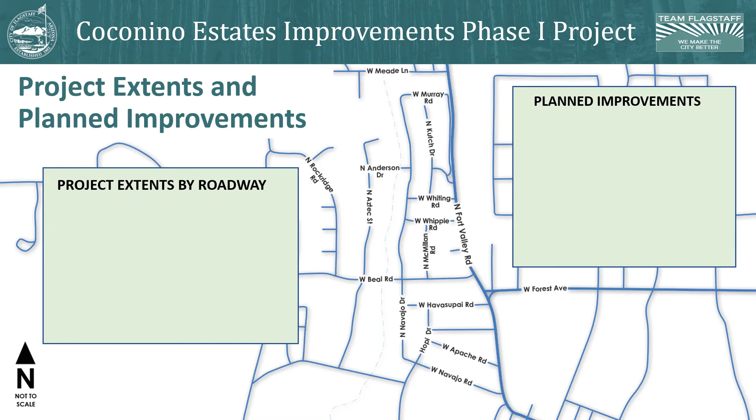Here we're highlighting the project extents and planned improvements. The project extents by each roadway are West Beal Road from Rockridge to Fort Valley, North Navajo Drive from Navajo Road to Murray, West Navajo Road from Navajo Drive to Fort Valley Road, and West Whipple from Navajo to McMillan.

Planned utility and roadway improvements generally include replacing water and sewer mains, water and sewer services to individual residents, fire hydrants, storm drains, street lights, underground electric lines to street lights, roadway pavement, curb and gutter, sidewalk, and finally, we'll restore disturbed landscaping at the completion of the project.

On Whipple Road from Navajo Drive to McMillan Road, there will only be improvements to the existing water main and water services. On Navajo Drive, from Havasupai Road to Hopi Drive, the existing sewer main will not be replaced, as this section of sewer main was replaced in 1988.

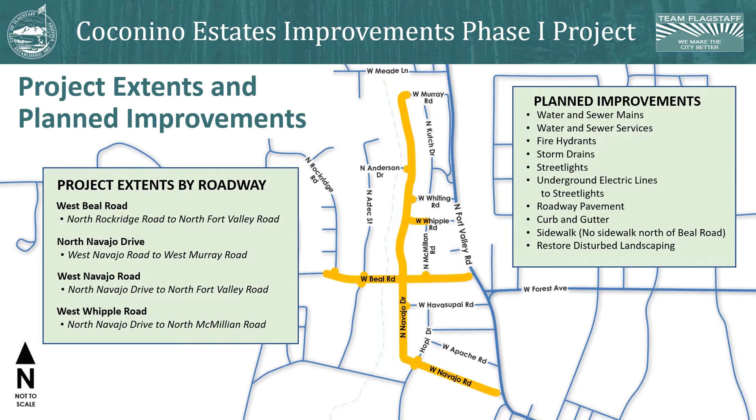Sidewalk will be installed along the entire project extents even where it does not currently exist, except for project extents north of Beal Road.

Here we'll discuss the sequencing of construction activities and our anticipated schedule. To better understand construction as it progresses, we've broken it out into 4 construction zones.

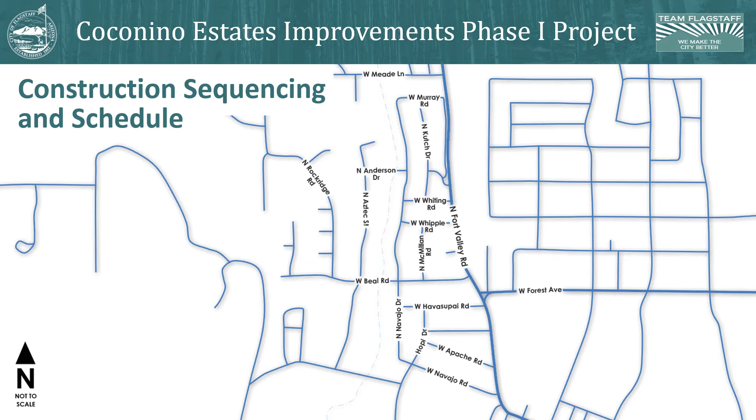Our intent is to begin the first construction zone in mid-May. Zone 1 includes improvements along Navajo Road from Fort Valley to the intersection of Hopi Drive. We anticipate completion of Zone 1 by fall of 2020.

Zone 2 will move on to Navajo Drive between Hopi to Beal. This zone will begin in summer of 2020 and extend through summer of 2021.

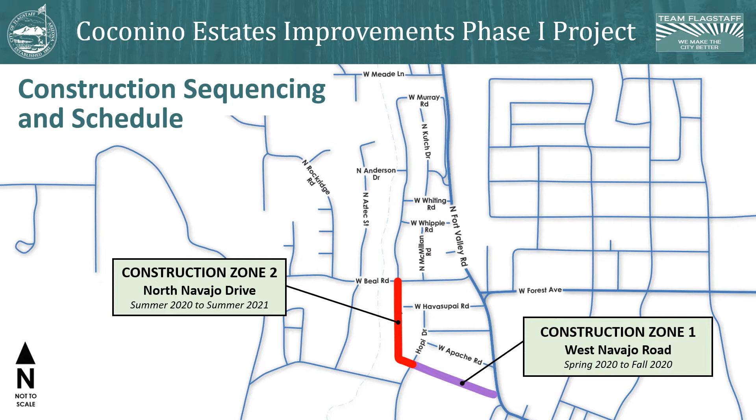Zone 3 of construction will move on to Beal between Fort Valley and to just west of the intersection with Rockridge. Zone 3 will begin in winter of 2020 and extend for 12 months through the winter of 2021.

The final area of construction, Zone 4, will move on to Navajo Drive between Beal and Murray and along Whipple from Navajo Drive to McMillan. Zone 4 is to begin in summer of 2021 and continue through fall of 2022.

Each of these work zones will start with the underground utility improvements and then, a few months later, begin the roadway or surface improvements. The restoration of disturbed landscaping will be completed when temperatures and weather will allow, but may jump around from construction zone to construction zone depending on the type of landscaping being restored.

Work hours throughout all construction zones will be Monday through Thursday, 7 a.m. to 5 p.m., with occasional work on Fridays. The overall construction schedule for the project is spring 2020 through fall of 2022. Please understand that these dates are tentative and are subject to change due to weather and other unforeseen factors.

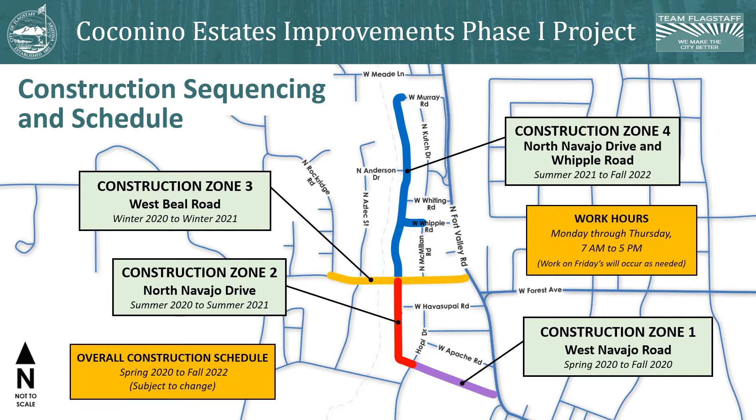Now we'll discuss exactly how this improvements project will be built. Almost all underground utility and surface improvement projects start with the construction of the utilities first. There are multiple underground utility improvements on this project, all of which have a certain order in which they are installed. Here's what you can expect to see and the order in which the utilities will be installed on any given street.

The first utility will be the sewer main line, services to residents, and manholes. Our crews will progressively saw cut and trench down the roadway as we install the new utility, leaving as much of the existing roadway as possible. This will help with keeping the job site clean, contain stormwater runoff, and aid in vehicular access.

Most of the time, the sewer main line is the deepest utility and installed first. There are no sewer service interruptions to your home expected during construction of the sewer main line.

Water main line will follow the sewer line installation. We are installing the new water main line in a different location from the existing one serving your homes. This way, we can make sure that everyone has water to their homes throughout construction. There will be short outages in order to swap over old lines to new lines, and these shutdowns are discussed later in this presentation.

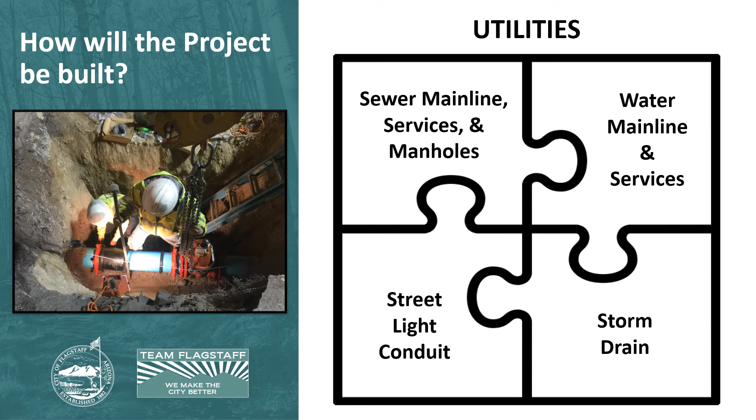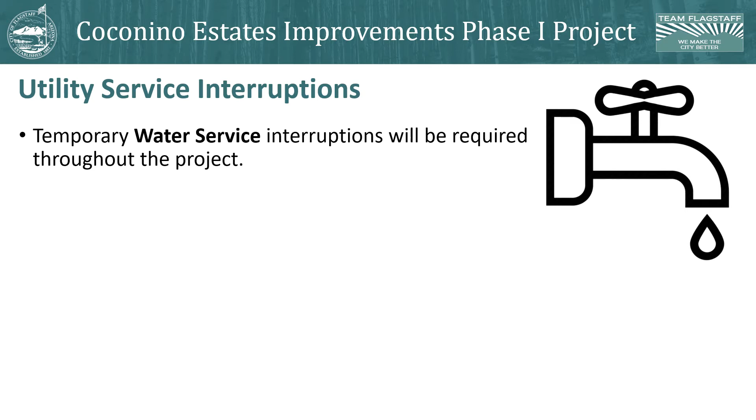During the utility portion of the work, there will be short service interruptions to the water system. These happen when we tie in the new water main line into the existing water system and when we switch the individual service lines to residents from the old main to the new main. These shutdowns are typically short durations.

Notifications will be sent out 48 hours prior via door hangers and e-news notifications for these shutdowns, letting everyone know the day and time window of the shutdown. We typically try to time these shutdowns during low use hours, and with this being a residential neighborhood, that would typically be mid-morning through midday.

When the main line is tied in, these shutdown windows can last as long as 8 hours, and when services are swapped over, it can take up to 2 hours. We build the system in a way to make sure that everyone has water for as long as possible and to make shutdowns as short as possible.

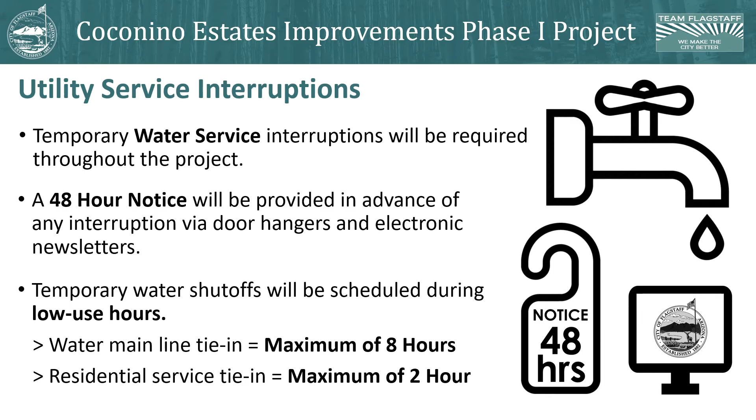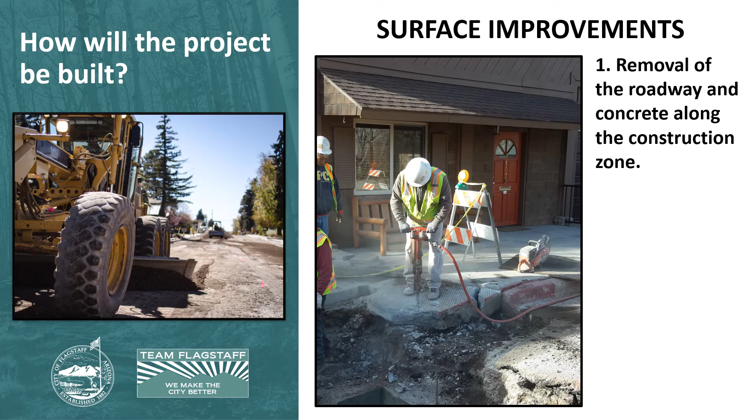Once utility work is near completion, the surface improvements will begin. The first step is to demolish the remaining roadway, including the concrete curb. Then, we'll grade the area in preparation for new curb, sidewalk, and driveway entrances.

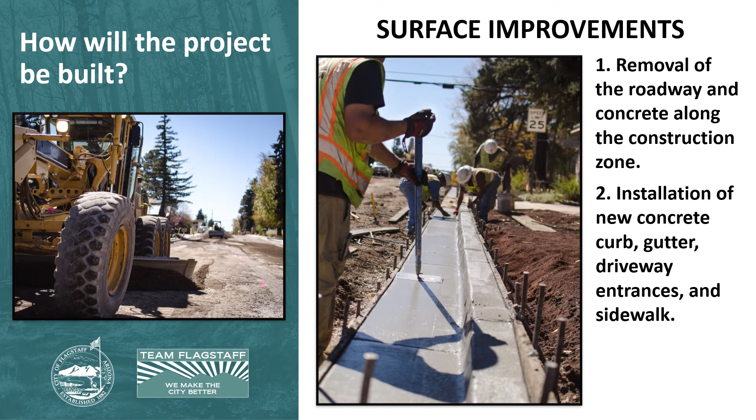During the next step, our concrete crews will set forms and begin pouring concrete for new curbs, sidewalks, and driveway entrances. In order to keep everyone's driveways open, we will always build one half at a time to ensure access. Once the new curb and concrete work is complete, preparations for the new asphalt pavement will begin.

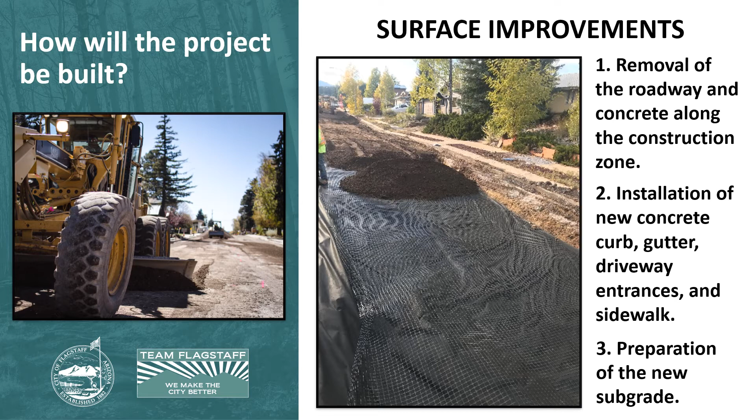Due to the soil types in this area, a large amount of the subgrade under the existing asphalt needs to be removed and replaced with a better material and also a fabric and grid. This will make for a better base for the new road, making it last much longer.

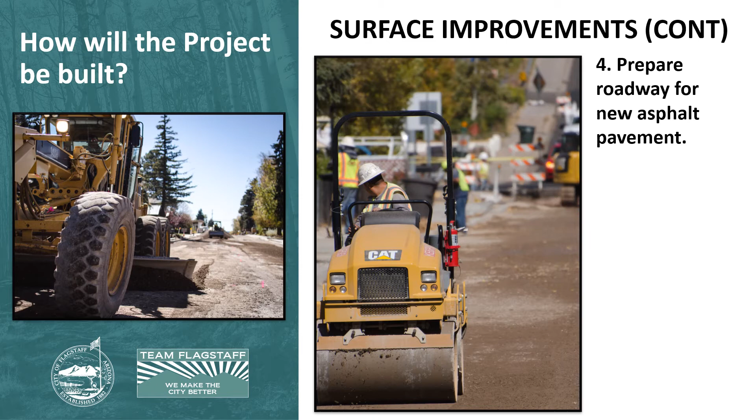This work will be done in smaller sections and will include excavating approximately 2 feet of earth, laying down fabric, plastic grid, and then filling in over the top with an aggregate base course. During the grade preparation work, there will still be access for residents. We will ramp material at driveway entrances so they can still be used.

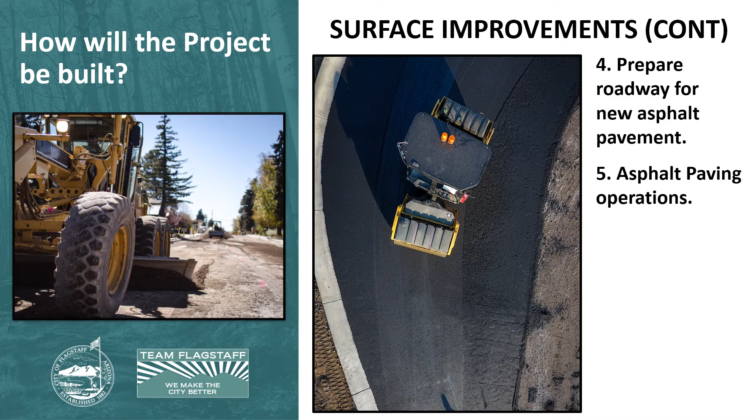Once the entire construction zone has been prepped, we will begin paving operations. Paving operations should only take 1 day per construction zone, but vehicular access during paving operations will be limited. Notification for this operation will be sent out approximately 1 week ahead to make sure everyone can plan accordingly and coordinate ways to get in and out of their home.

When paving operations are done, we will be jackhammering areas throughout the roadway where the manholes and water valves are located, raising them up to the new finished road grade. After this, striping will be completed and landscape restoration throughout the construction zone will commence.

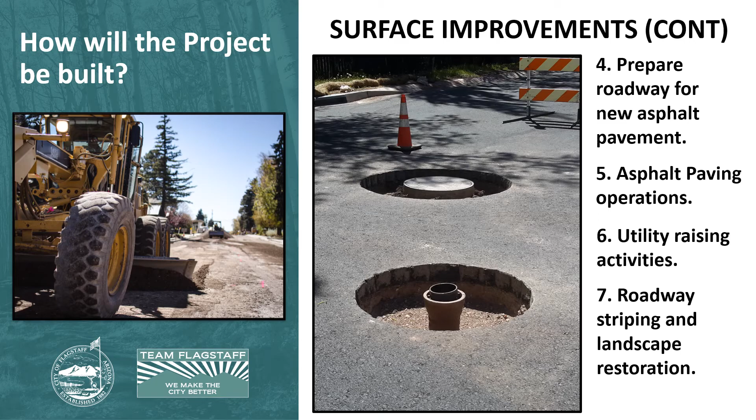When each construction zone is started, traffic control measures will be put in place. In most cases throughout the project, we will put up what is called a soft closure. For visual purposes, we will use the Navajo Road construction zone to illustrate this setup, what residents that live in the project extents can expect, and how they can access their homes throughout the project.

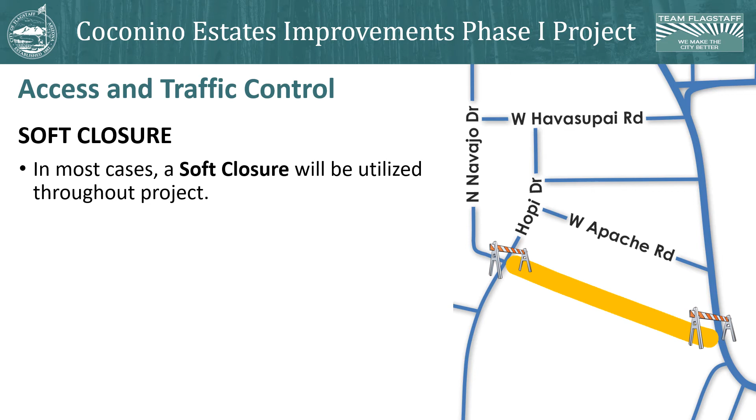Soft closures consist of a road closed sign at either end of the construction zone or work area. For Navajo Road, there will be one at the intersection of Highway 180 and Navajo Road, and another at Navajo Road and Hopi Drive. A road closed sign will be in the center of the roadway, stating that the road is closed and that only local access is allowed. There will be room on either side of the sign for residents of the street to be able to go around. We do this setup not to stop, but realistically limit traffic that is passing through the construction area.

We understand that everyone needs to access their homes throughout the project, but limiting non-resident traffic through the construction site provides a much safer work zone not just for our crews, but for everyone.

Alternate routes will direct non-resident traffic around the soft closure. During closures, there will be no on-street parking allowed, so we can utilize the full width of the roadway to detour traffic. With the soft closure of the entire construction zone 1 area, we will most likely be working only in a select area along the roadway.

Within this area, there will be crew members, equipment, and very likely open trenches. To ensure residents and our crew's safety, we will have flaggers on each side of this immediate work area.

We ask that residents that need to access in or beyond the work area stop at a flagger and let them know where you need to access, and a crew member will direct traffic in a safe path to where they need to go. We will do our best in a timely manner as possible to getting residents through, but please expect minor delays so we can make sure paths are safe and clear.

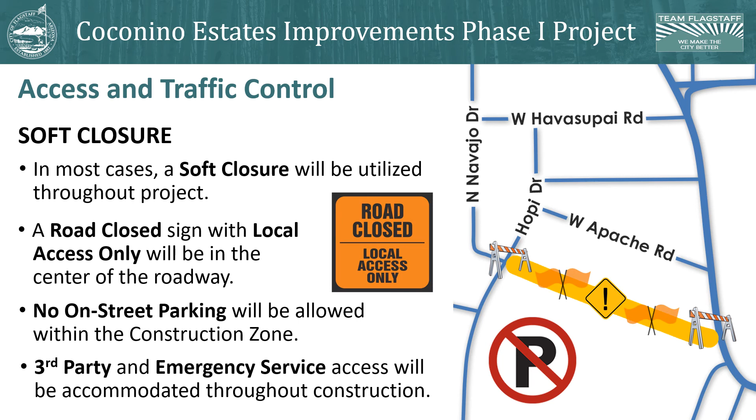Other services such as Mountain Line and FUSD bus routes will be redirected, and we have been in discussions with these entities already. These alternate routes will be distributed through a handful of outlets to make sure everyone is aware of the changes and when those changes will occur.

There will be instances throughout the project where a hard closure of an area will be required, where there will not be any traffic allowed through the construction zone. As an example, we will need to do a hard closure at the intersection of Navajo Road and Hopi Drive. As of now, this is planned for summer 2020, so not to affect the school traffic to Marshall Elementary and Flagstaff Junior Academy.

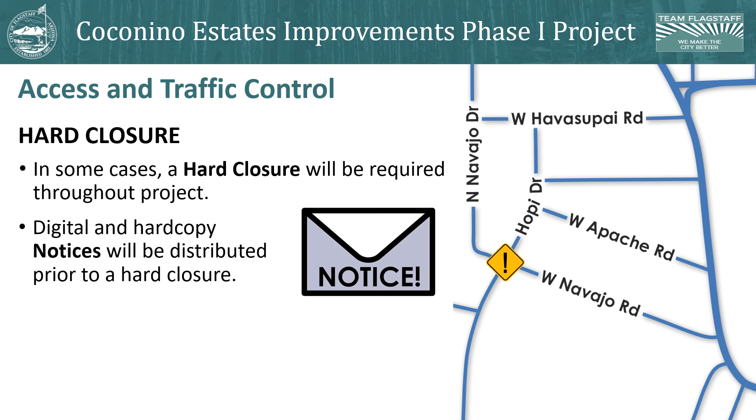Prior to these closures, notifications will be mailed out, hand-delivered to residents within the construction zone, and published in our weekly electronic news updates. During these closures, detour routes will be posted for alternate access around the areas. These closures are shorter in duration, and we will work to get them back up as soon as possible.

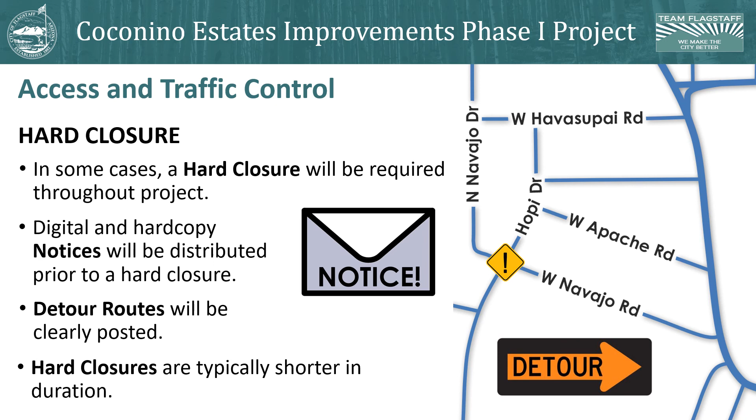We will make every attempt to temporarily open these closures up over weekends to alleviate any inconvenience. We have to make sure that these areas are safe prior to allowing traffic.

Prior to any activities commencing in your construction zone, a pre-construction notification flyer will be hand-delivered to your doorstep by a project team member at least 2 weeks prior to any work starting up.

The best way to stay informed will be subscribing to our weekly electronic newsletters, or e-news. E-news will be released via email weekly and will highlight upcoming construction activities, changes to traffic control, or project milestones completed.